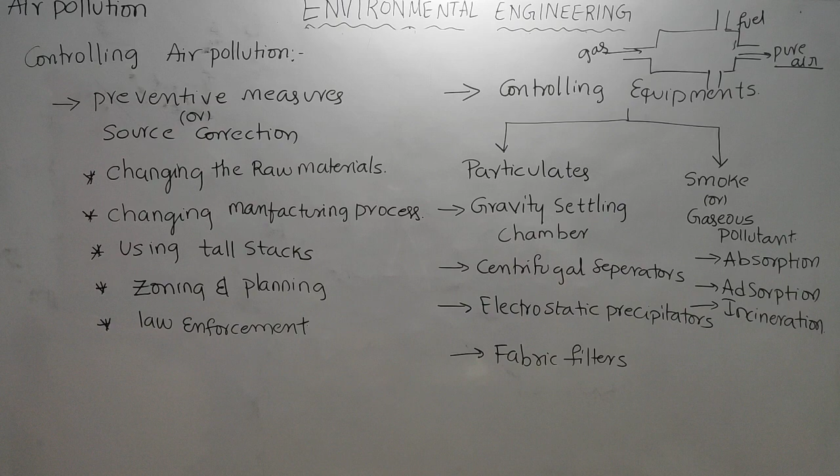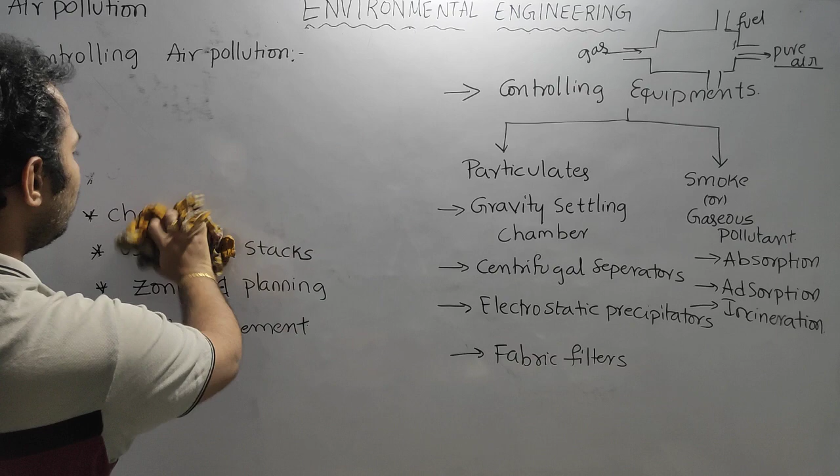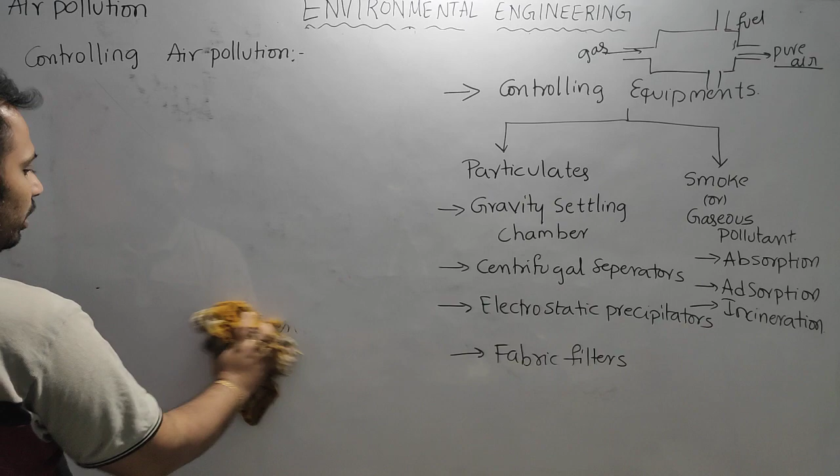In the previous session, we were discussing the controlling equipments for particulates as well as smoke. So here we have discussed all these things: gravity settling chamber. Actually, a small correction here in the gravity settling chamber. Generally, all these equipments work in the dry state. So no spray of water we do here, because if that is there, we call them wet control devices. These are all dry control devices.

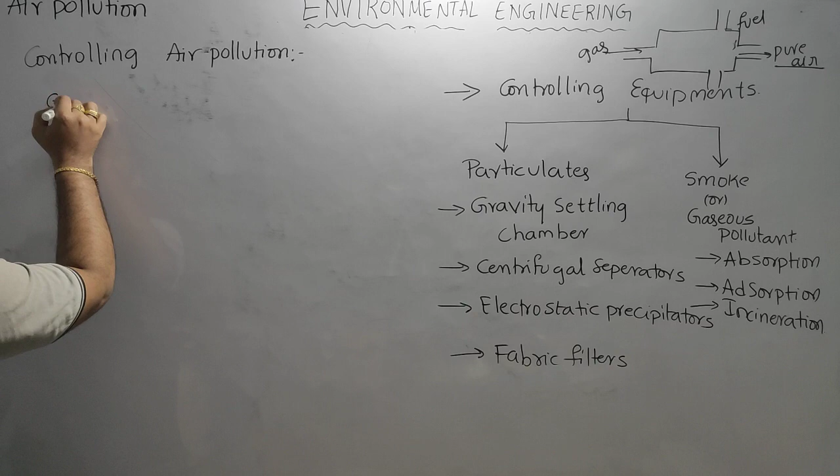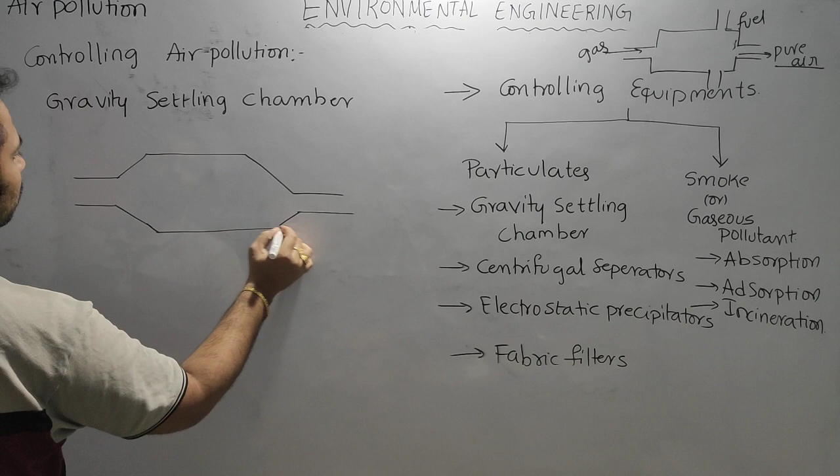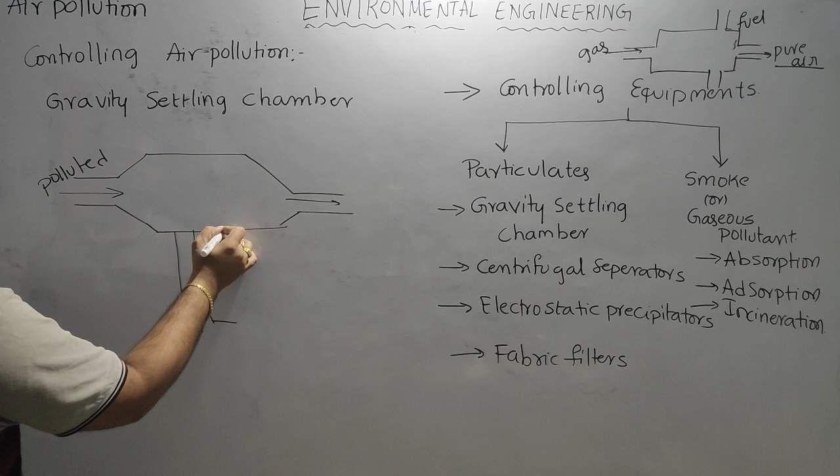So in the dry control devices, the gravity settling chamber, if you look at it, there will be a chamber. Here there will be fans, which pull whatever polluted air is coming into it. So these exhausters will pull down the pollutants.

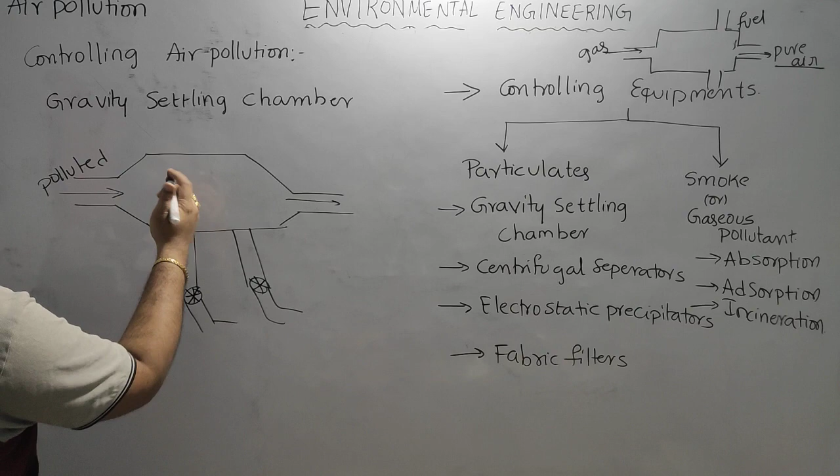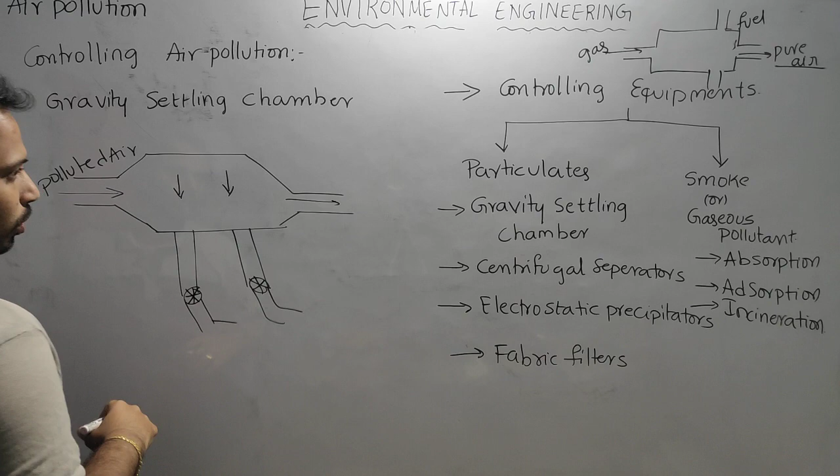They will pull down, that means a velocity will act in this direction. This is the settling velocity. So we send the polluted air into it and we reduce the velocity of the polluted air inside this gravity settling chamber, and some downward velocity will work here. This downward velocity will bring the pollutants down.

Gravity settling chambers generally can only remove larger particulate matters, where the diameter of the particulate is more than 50 micrometer. And the efficiency will be less than 50% because it does not work that much better.

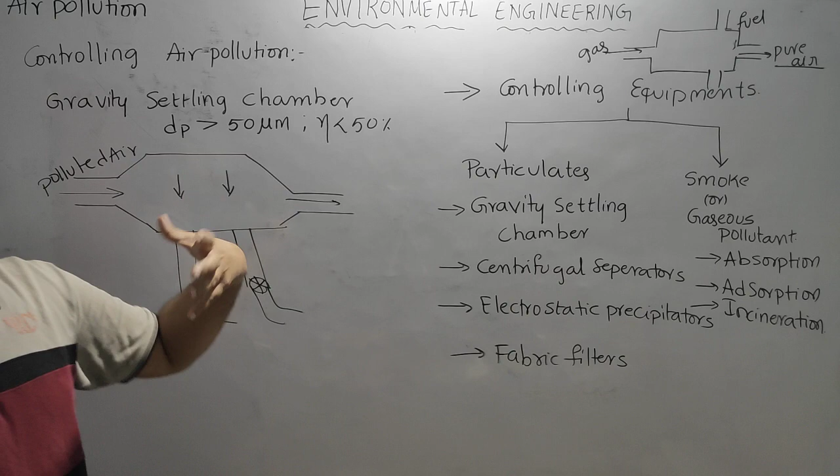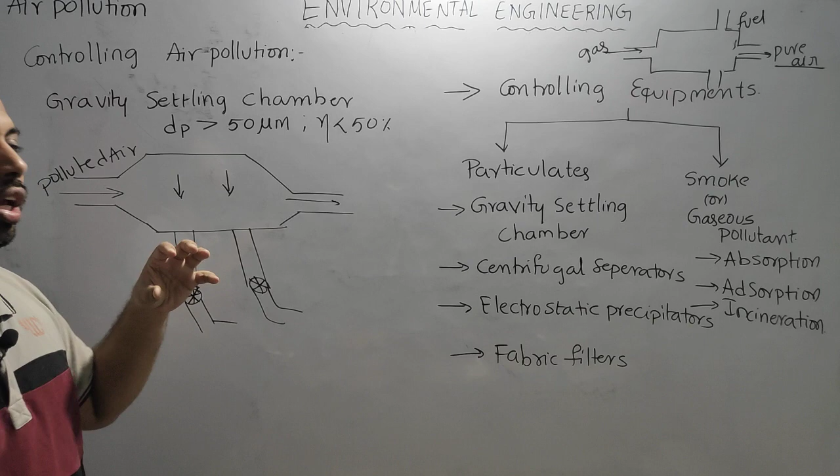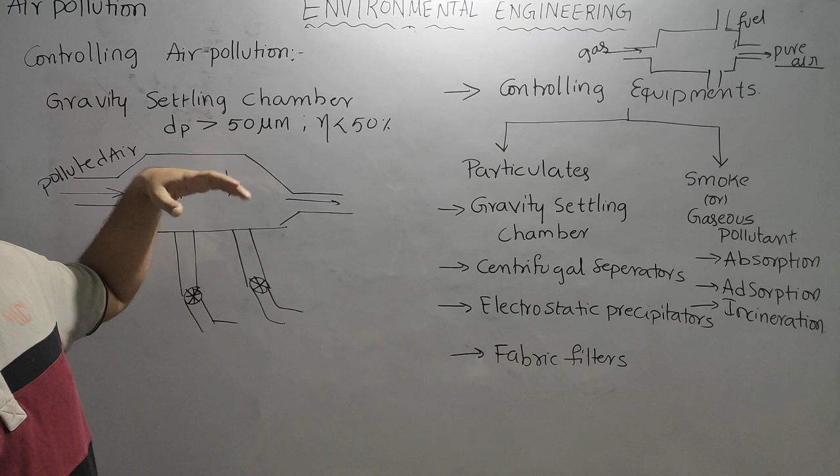We are only pulling down with some velocity, because the force is gravity. Generally the finer particles cannot be controlled by gravity forces. In soil mechanics, finer particles can be controlled with surface forces. So the gravity forces only act on the particles which are larger. Gravitational settling works only on particulates which have a gravitational effect on them. So only the larger particulates can be removed in this chamber, finer materials cannot be removed. That is why the efficiency is very less.

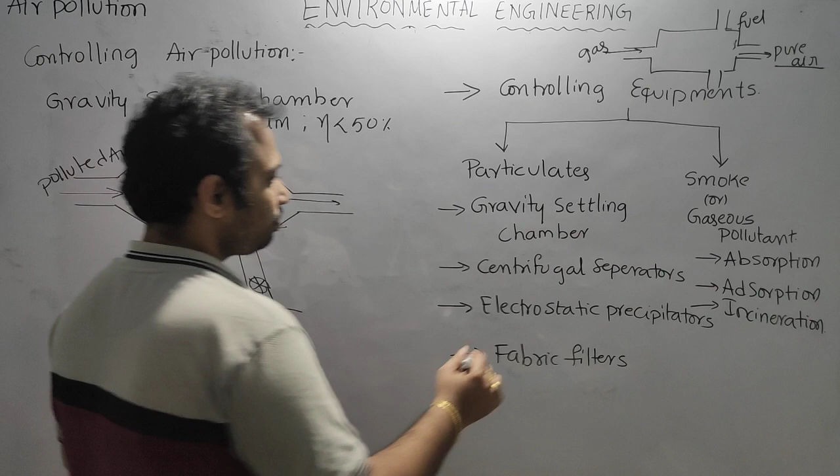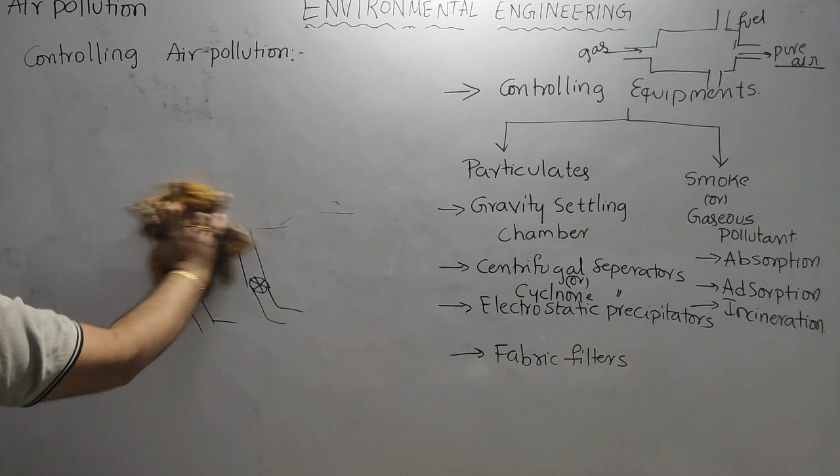Even in the centrifugal separators, or we call them cyclone separators, they are also dependent on a force. Here it is gravity force; there they are dependent on centrifugal force. So in the same way, we are applying some force on the particulates, but it does not work that effectively. It may be better than the gravity settling chamber, but not the best option.

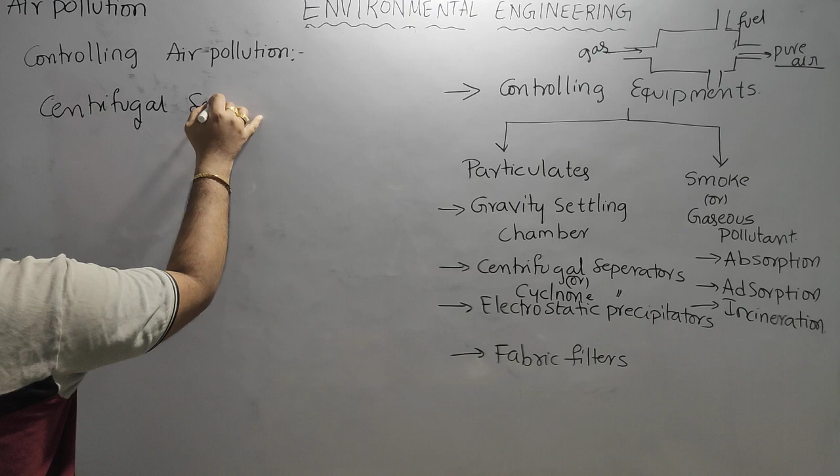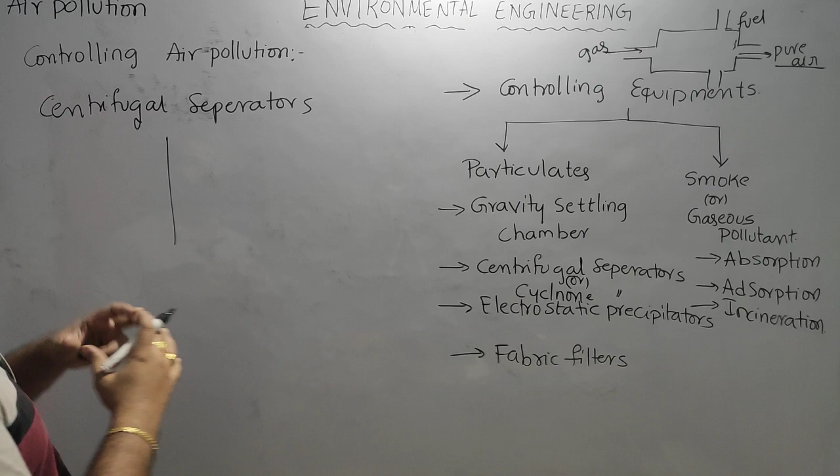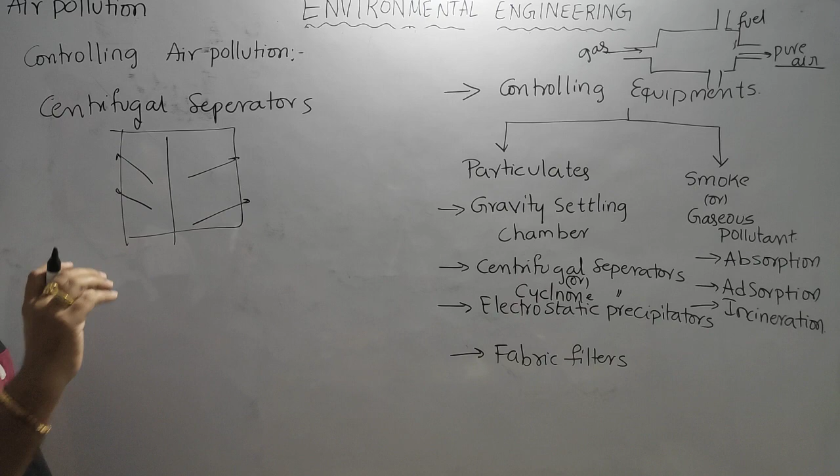So here we will be having a shaft. The shaft will rotate and cause low pressure at the center and high pressure at the outside, because of which the pollutant gas will move away from this shaft. So because of the centrifugation, the particles may get removed. To some extent they will be removed, but not to the extent needed.

Here the diameter of the particle that can be removed is approximately in the range of 5 micrometer to 25 micrometer, and the efficiency varies between 50 to 90%. That is for the centrifugal separator.

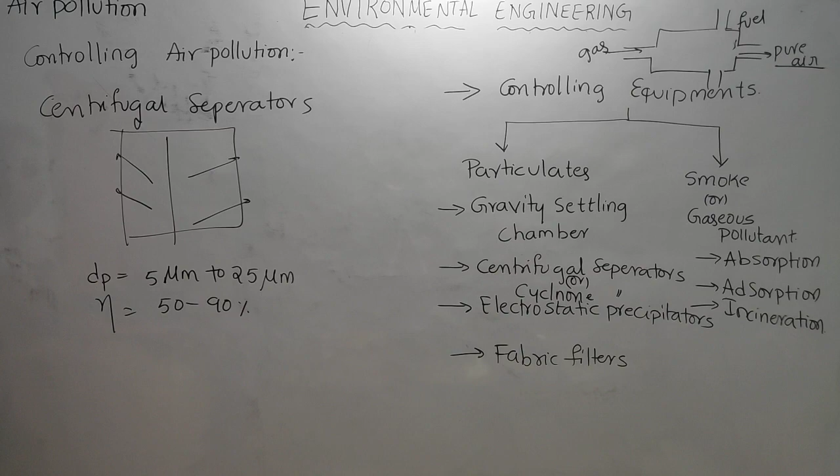Electrostatic precipitator. This is very, very important for the examination.

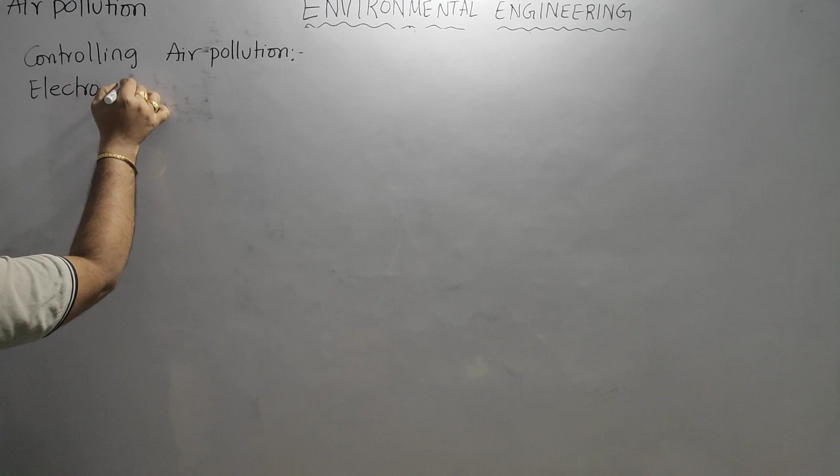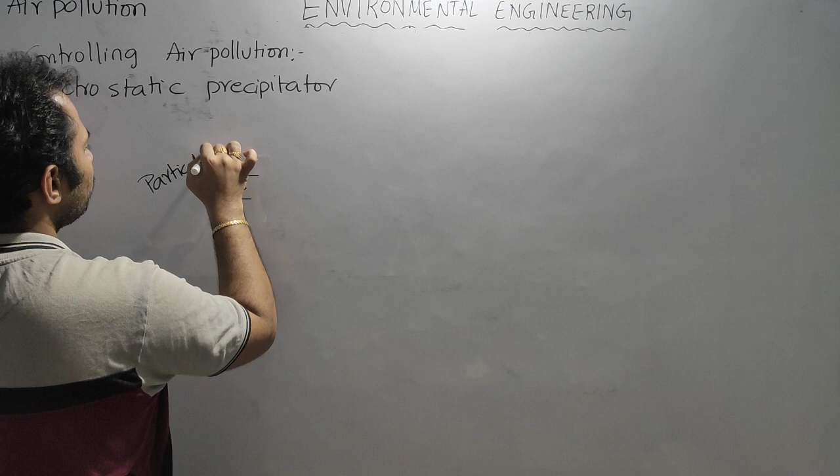Electrostatic precipitator. Here we send the gas, using direct current, through the electrical field. So we will send the gas or particulate matter into the electrical field.

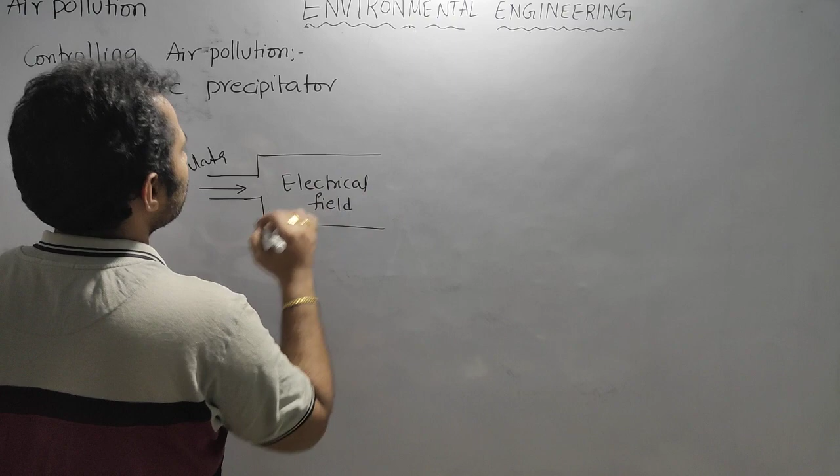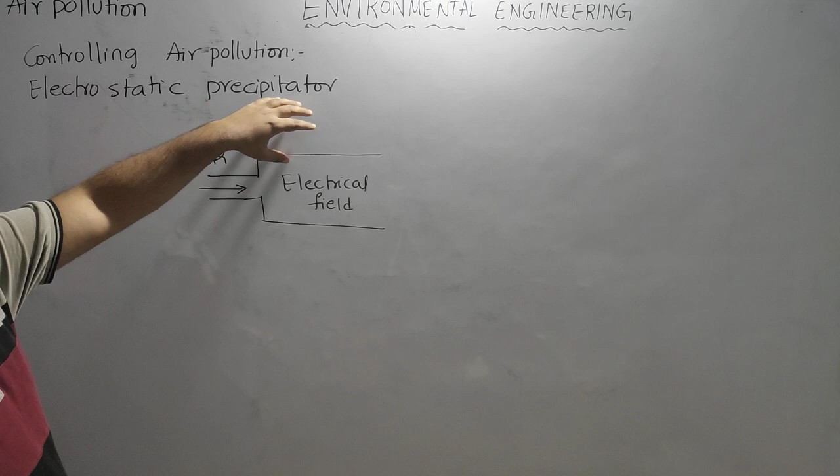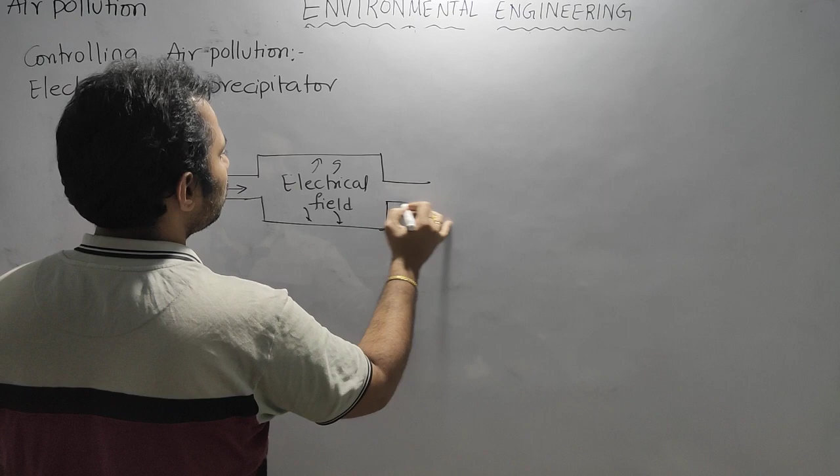When it goes into the electrical field, there will be opposite charges. Generally the particulates carry negative charge because they are very fine, because of wear and tear and all. So we will create a positive charge in this electrical field. Whatever particulates are present will get attracted to the positive charge, and the clear air will go out of this electrostatic precipitator.

So it works on the electrical field, and the efficiency of this electrostatic precipitator is measured using the formula 1 minus e to the power of minus A into W by Q, where A is the area of the plate through which we are sending the particulates. Simply, we can take this as the cross sectional area. W is drift speed, and Q is the rate of flow.

Q is the rate of flow. So using this formula we can find the efficiency of the electrostatic precipitator.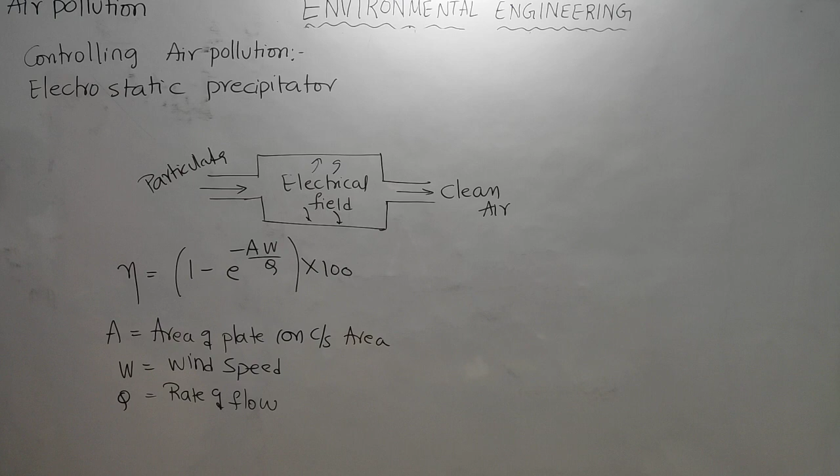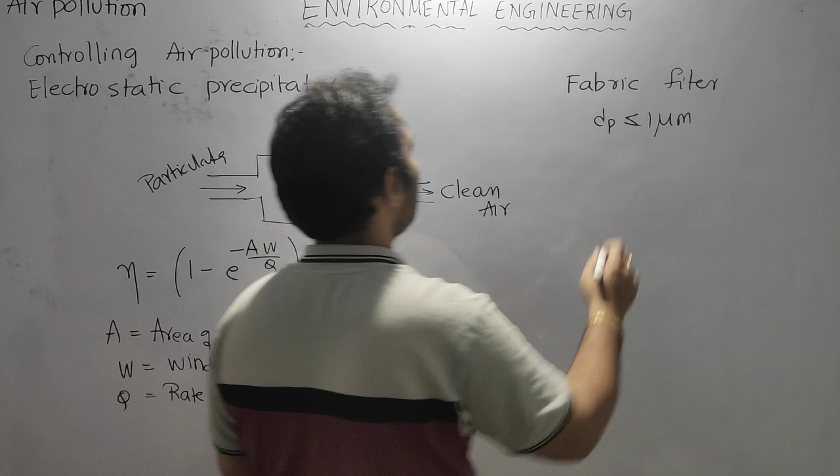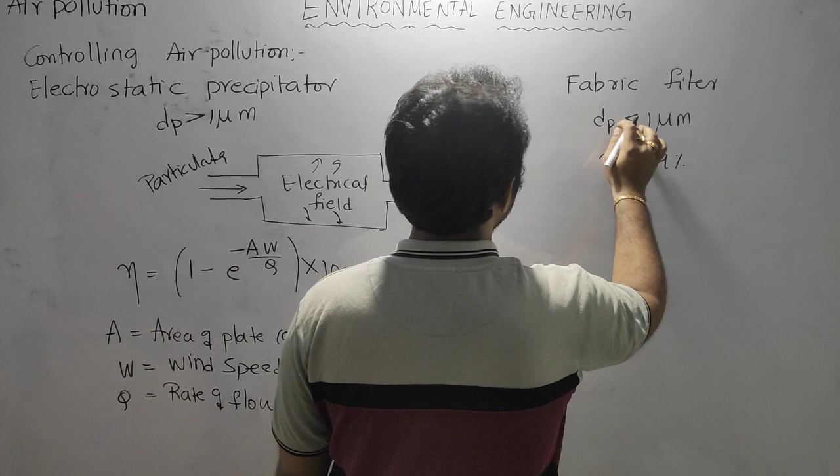Similarly, fabric filters are also filters which can remove very fine particles, and efficiency is also very high. When the diameter of the particle is less than 1 micrometer, it can be removed by fabric filters, whereas an electrostatic precipitator can remove only up to 1 micrometer and below that it cannot remove. So when it is less than 1 micrometer, we use fabric filters, which completely remove it, and the efficiency is greater than 99%. Generally it removes up to less than 1 micrometer.

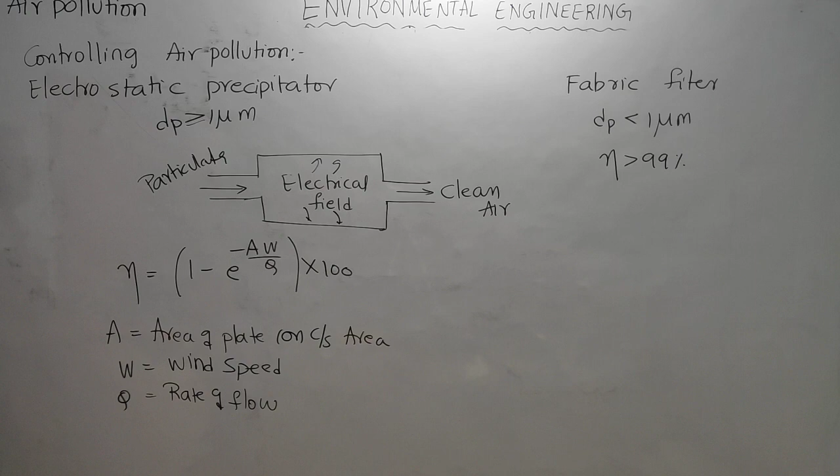So these are the different particulate removal equipments working on dry basis. Then there are wet controlling equipments, meaning they work on moisture also, for controlling air pollution particulate matter using wet controlling devices.

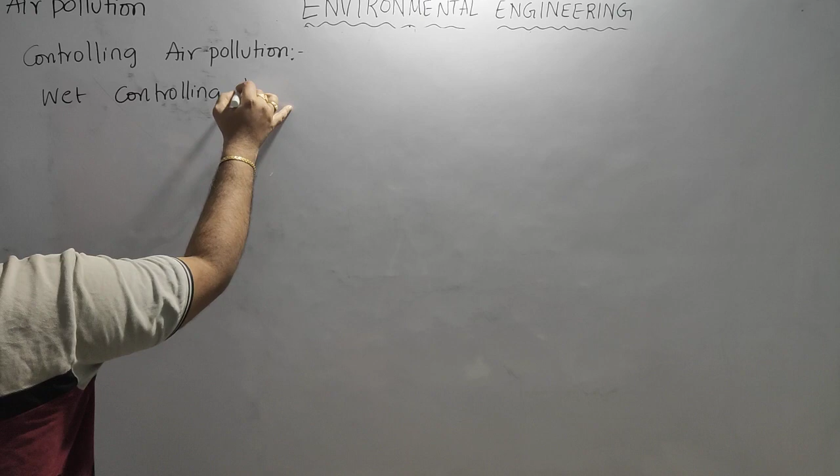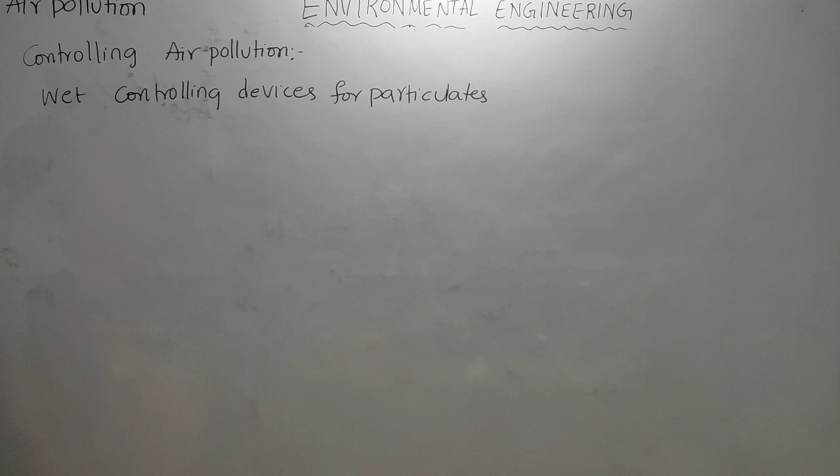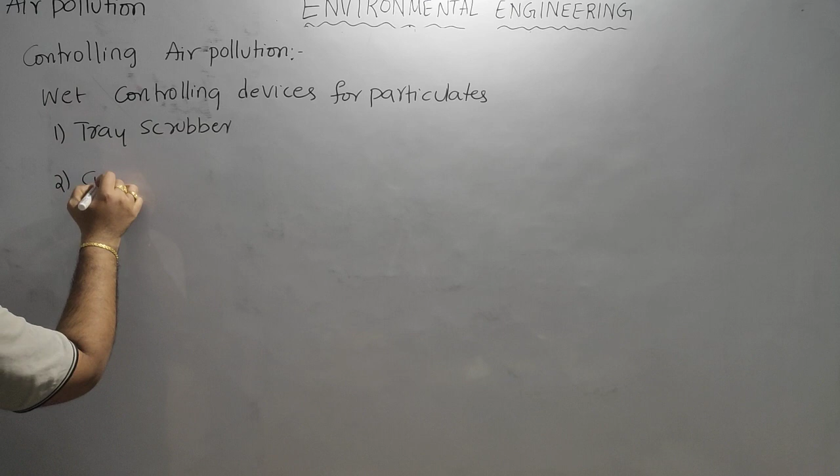So there are three: one is tray scrubber, cyclone scrubber, and the third one is wet scrubber, the Venturi scrubber.

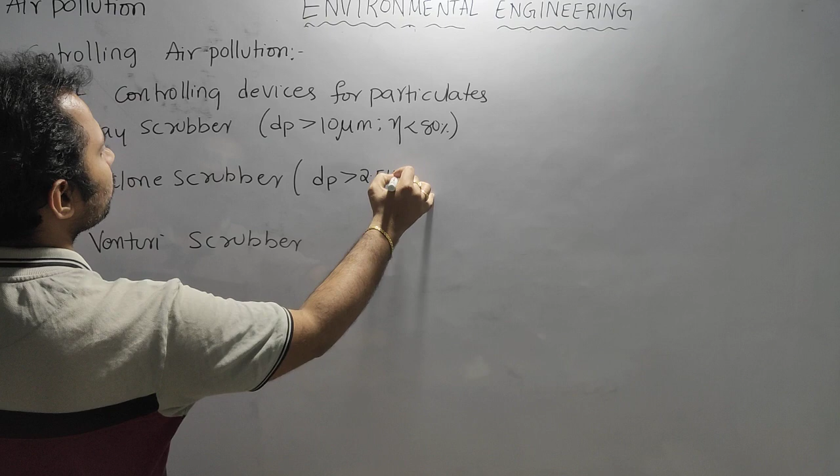When the diameter is greater than 10 micrometer, we use a tray scrubber. If the diameter is greater than 2.5 up to 10 micrometer, we use a cyclone scrubber, having an efficiency of 85%.

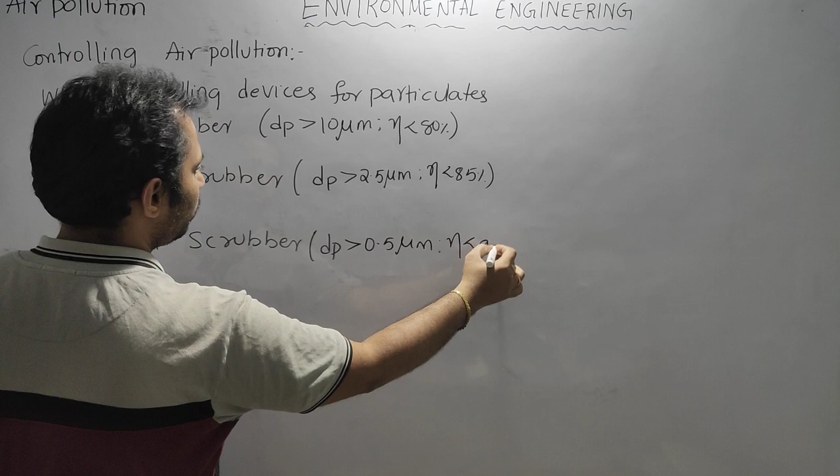If very fine particulates are present, in the range that can remove up to 0.5 micrometer, the efficiency is up to 90%. So these are the different controlling devices based on wet moisture.

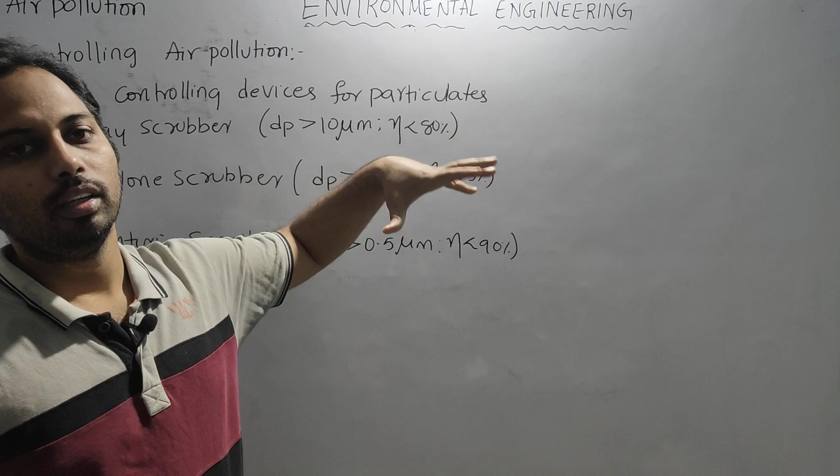Here we have a spray kind of thing, where water spray is present, which increases the weight of the particulate matter because of the moisture, and also creates adhesion. The particles attract each other, increasing cohesion by forming a layer of water on top of the particulate matter. This way we can remove the particulates very easily. So these are the wet controlling devices.

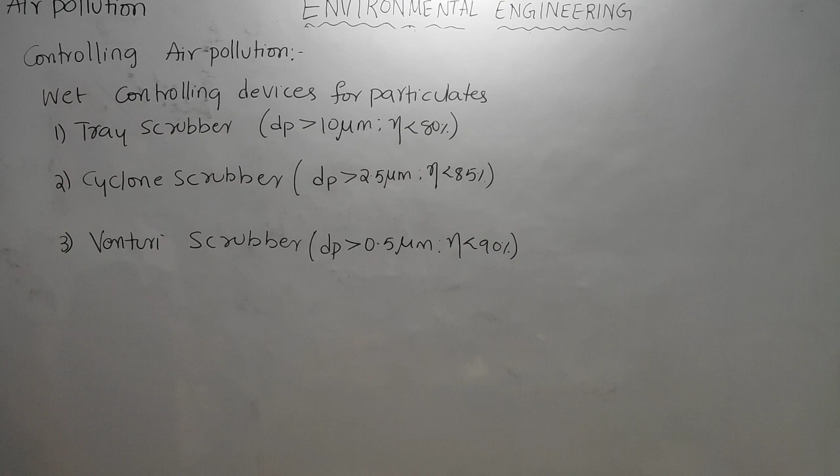And for gaseous controlling devices, as already told, there are three things: absorption, adsorption and incineration, or combustion. So incineration or combustion are both the same. These are the different types of controlling devices or controlling technologies. So this is all about air pollution.

Now we are discussing noise pollution. Noise pollution will be having only three formulas, very important. If we are acquainted with these three formulas, that is enough for the examination.

So what is meant by noise? A noise is nothing but any kind of unwanted sound, which will disturb our concentration, which is not wanted at all. That is nothing but noise, which is also a sound, but it is an unwanted sound.

So what measurement do we do for sound? How do we measure the sound? In the same manner we also measure noise. But sometimes noise can come from only one source, or from multiple sources, or from one source at different intervals of time, and it may be at different amplitudes, different intensities. So for getting an equivalent noise, an average noise, finding all these things is needed.

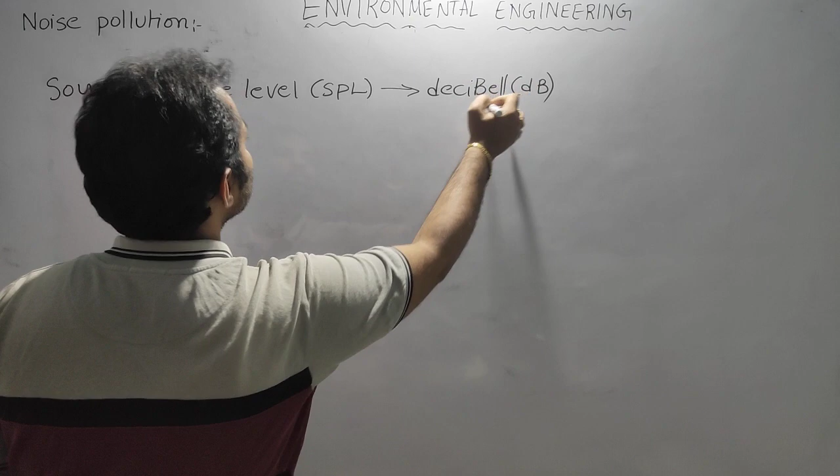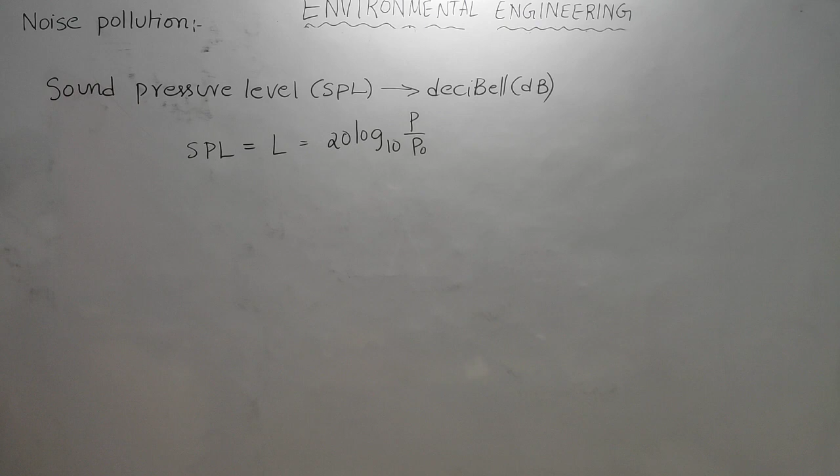So sound pressure level, SPL, is equal to, we represent it with L, 20 log base 10 of P over P naught, where P naught is the reference sound or reference pressure, and P is the pressure of the source in micropascal, where P naught is the reference pressure.

Reference pressure, which we take as 20 micropascal. So this is the formula which we use to find the sound pressure level.

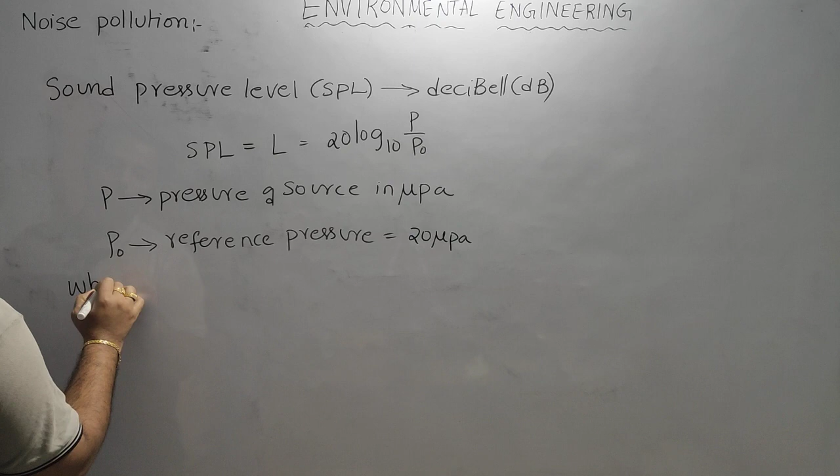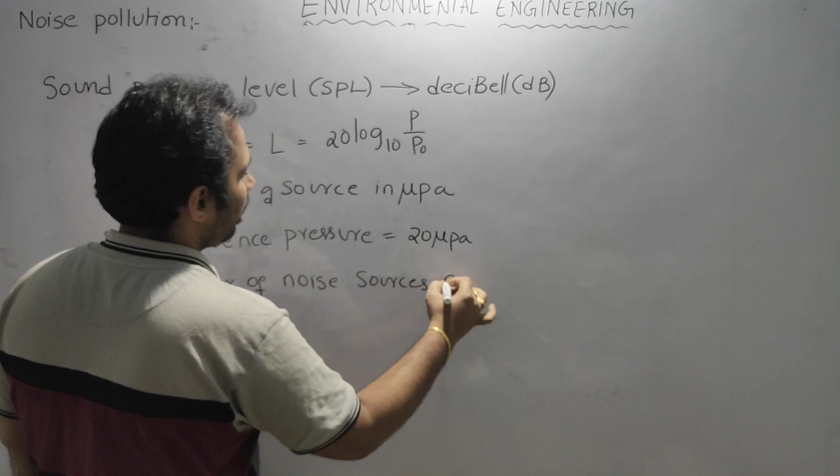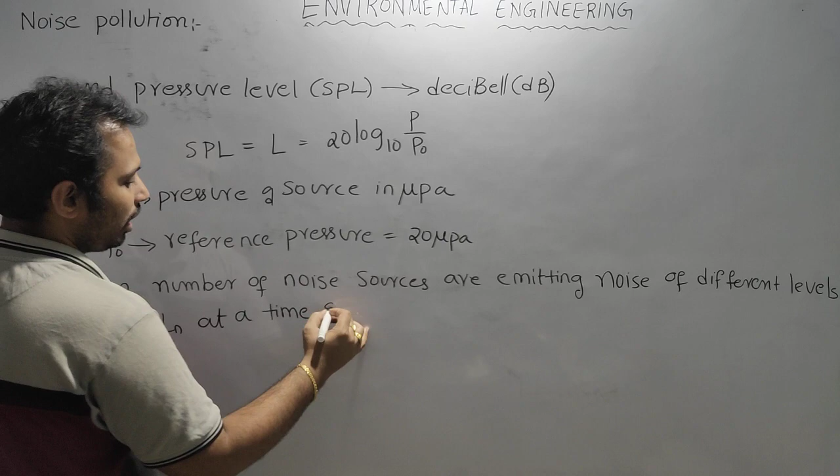So this is the first formula. Now, when number of noise sources are emitting noise of different sounds, of different levels, L1, L2 and so on, Ln, at a time and at a place.

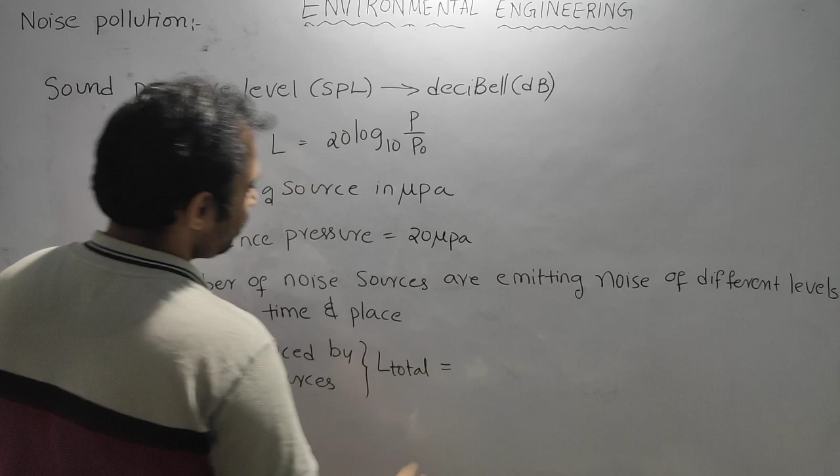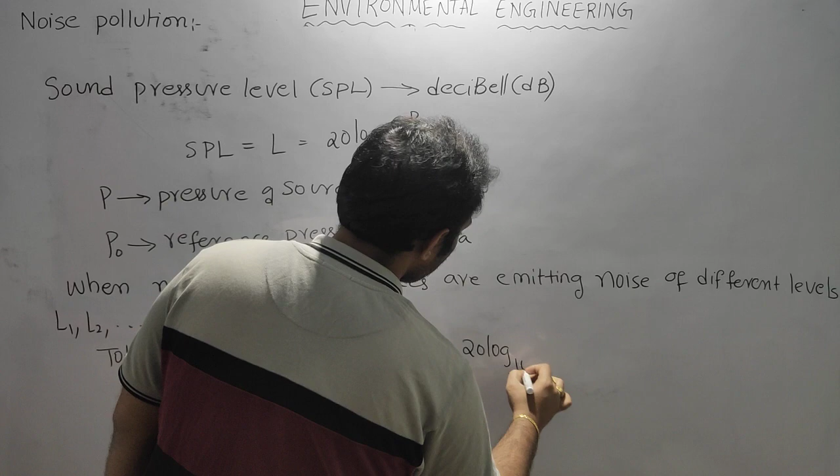Then the total sound produced by different sources, that is L total, is equal to 20 log 10 of PRMS by P naught.

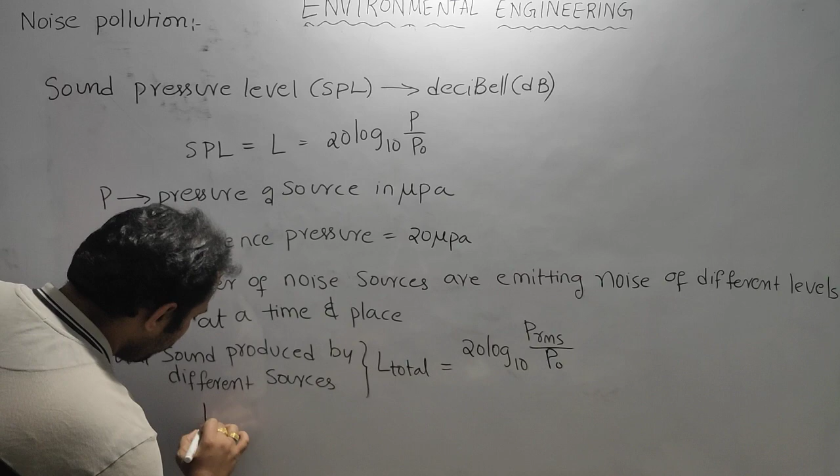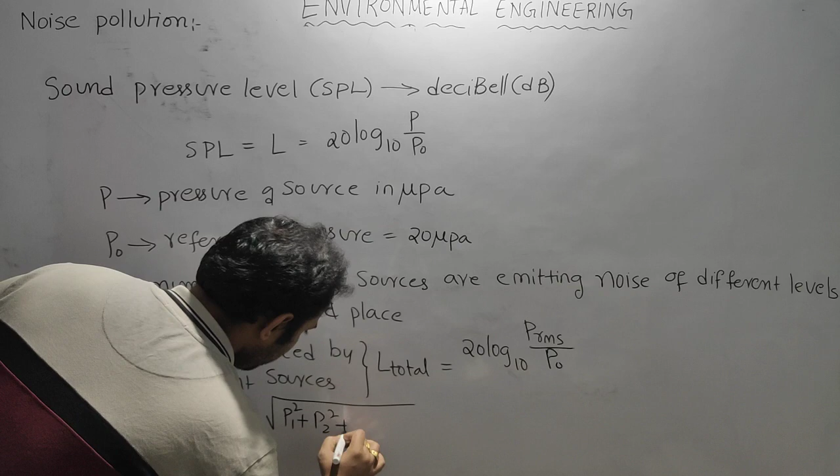PRMS is nothing but root mean square of all the pressure levels, P1, P2, and so on. By this way we can find the L total. So this is another way to find the L total.

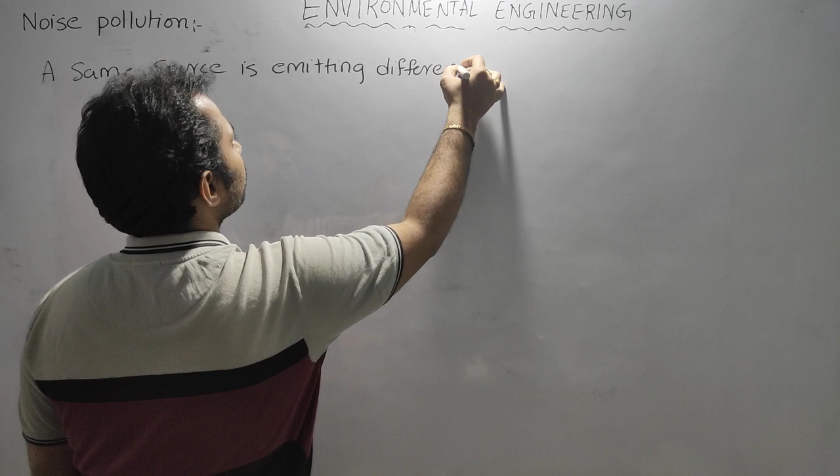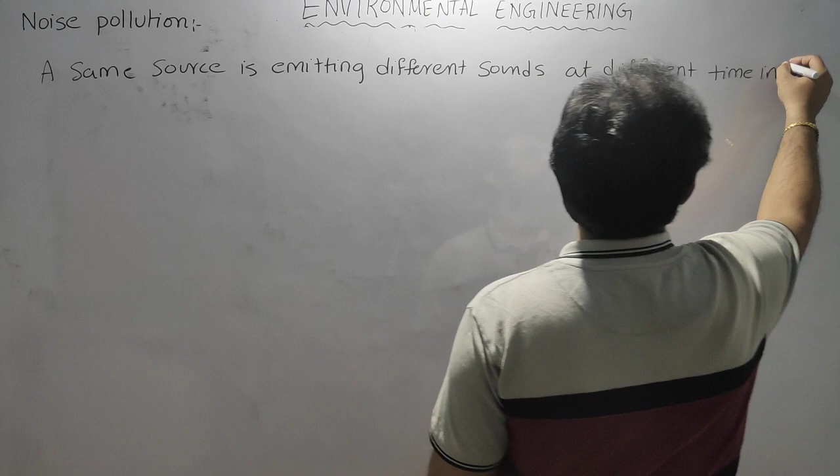If the same source is emitting different sounds at different time intervals, then the average sound of the source is calculated.

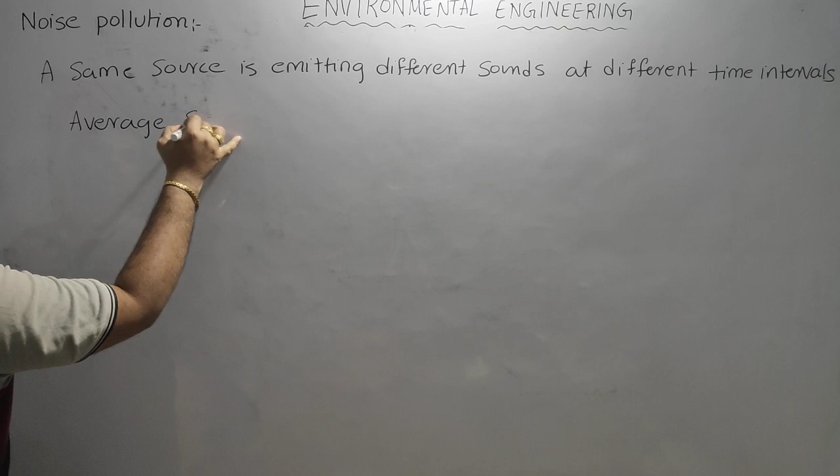Average sound of the source, L bar, is equal to 20 log 10 of 1 by n, sigma of 10 to the power of Li by 20.

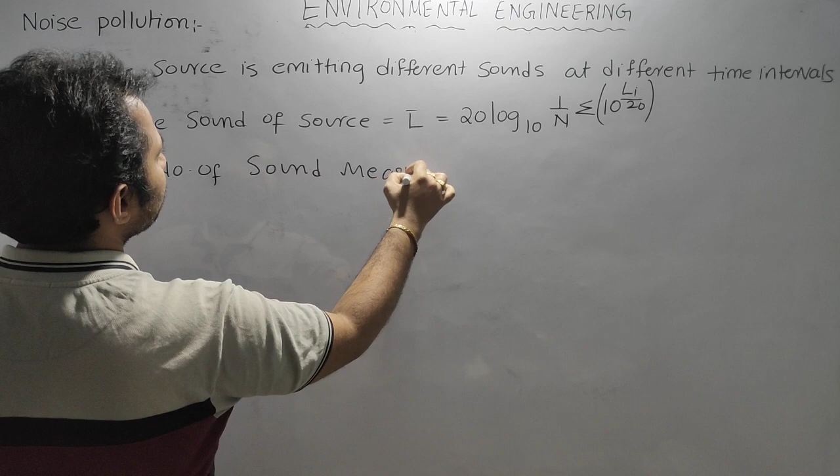N is the number of sound measurements. So at each measurement we will be having L1, L2, L3, like that.

So once the sound measurement has come, let it be P1. So L1 is nothing but 20 log to the base 10 of P1 by P0, that is L1. Likewise L2 is 20 log to the base 10 of P2 by P0. So likewise we find L1, L2, L3, or sometimes L1, L2, L3 will be provided directly.

So you can take that also. By doing that we can find the average sound of the source. From this average sound, we can also find the equivalent sound, equivalent noise.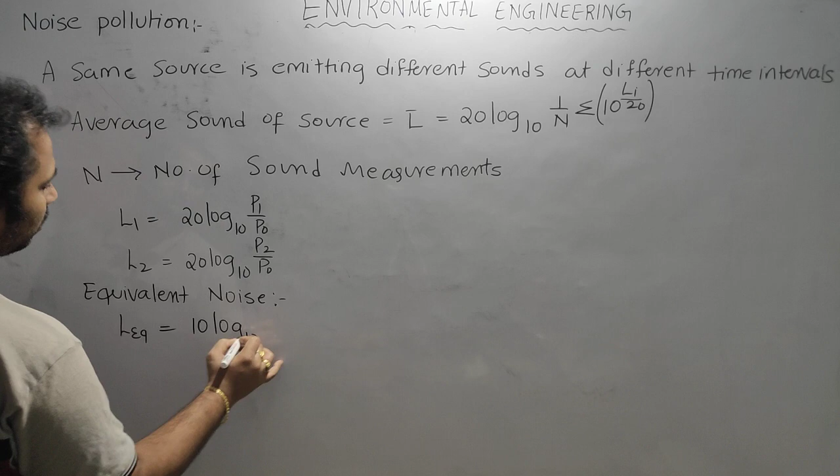Equivalent noise, L equivalent, is equal to 10 log 10 into sigma of 10 to the power of Li by 20 into Ti. So this is equivalent sound, this is average sound of the source, this is equivalent noise.

Equivalent noise: Ti is nothing but the average, that is the time period of that noise and the total time. Ti is nothing but Ti by capital T. Capital T is sum of all the times, that is T1 plus T2 plus T3 and so on up to Tn.

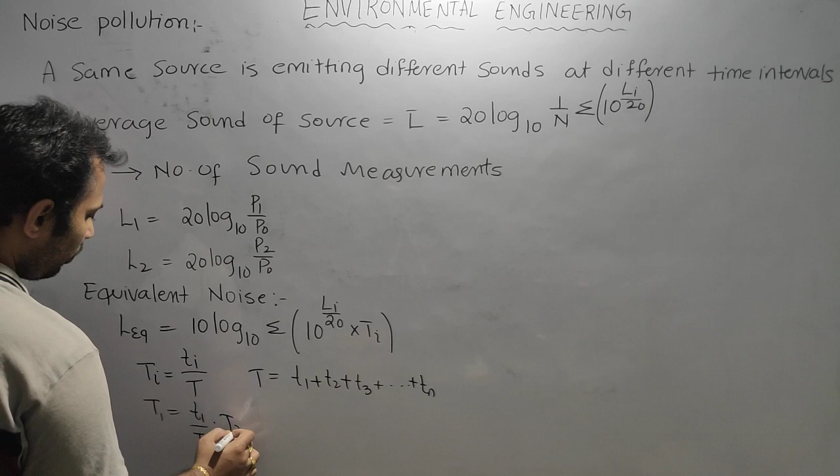So this is capital T. Small ti is nothing but T1 by capital T. So T1 is equal to T1 by capital T, T2 is equal to T2 by capital T, where capital T is the sum of all the durations. Li is the intensities, the sound pressure levels, SPL, that is L.

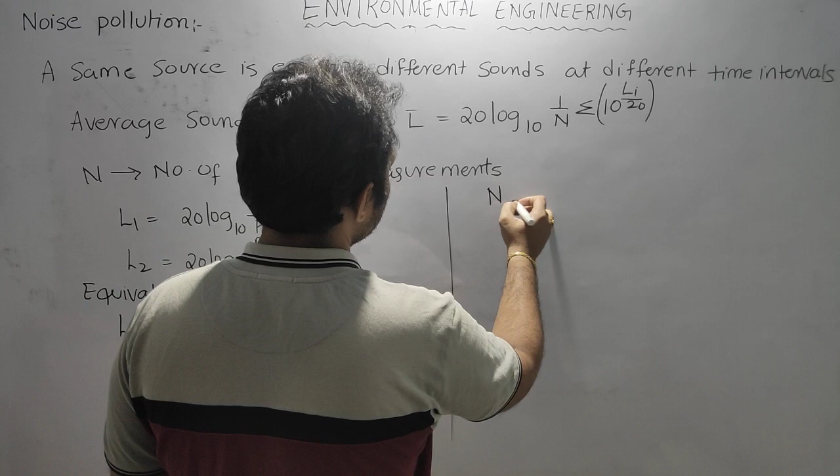So these are the formulas which are important for the GATE examination. And there are noise standards given by the Indian standards, Indian code, noise standards.

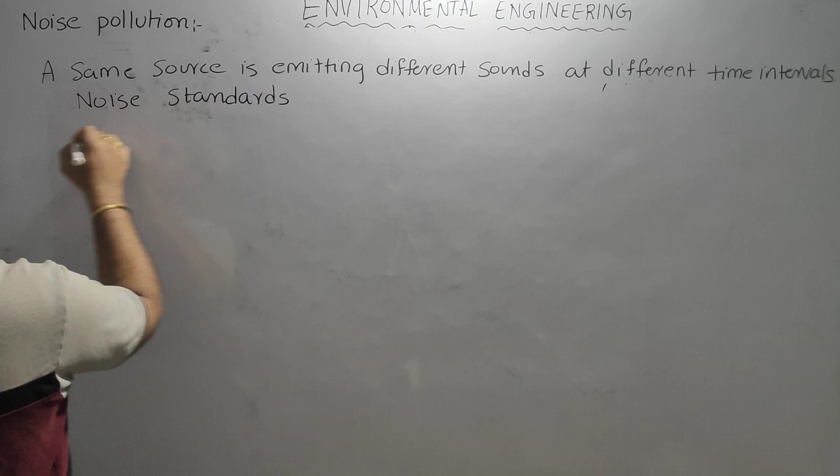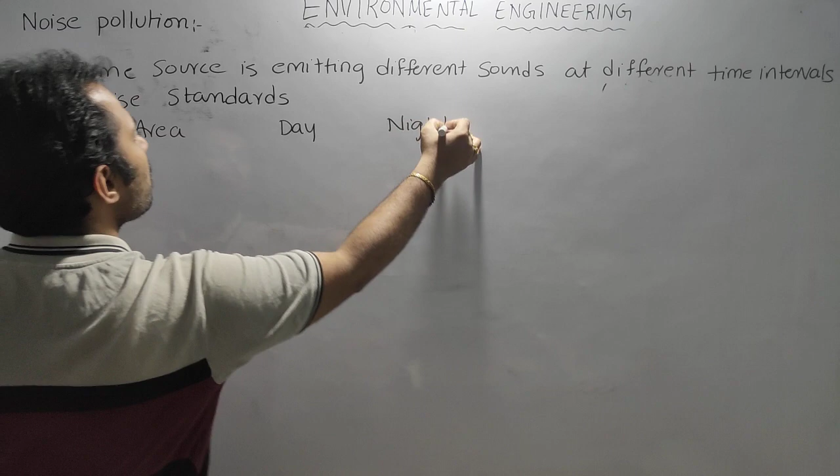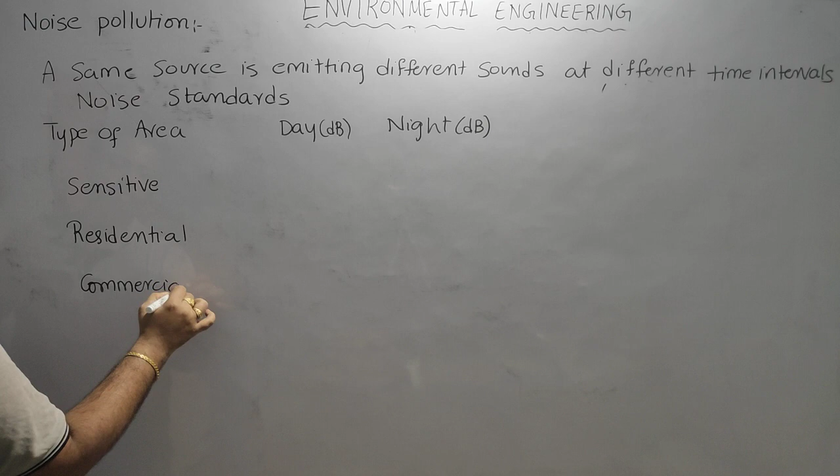Type of area, decibels: sensitive area, residential area, commercial area, industrial area.

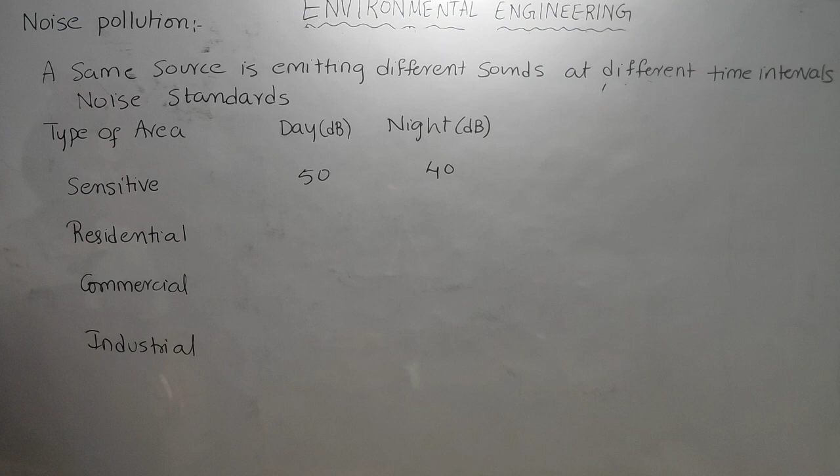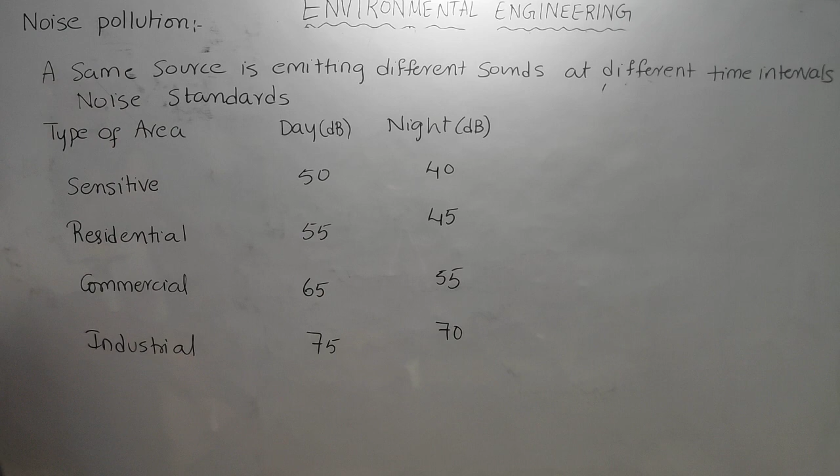During daytime 50 and during night time 40 for sensitive area. For residential area, 55 and 45. For commercial area, 65 and 55. For industrial area, it is 75 and 70. So these are the noise standards given by the Indian standards.

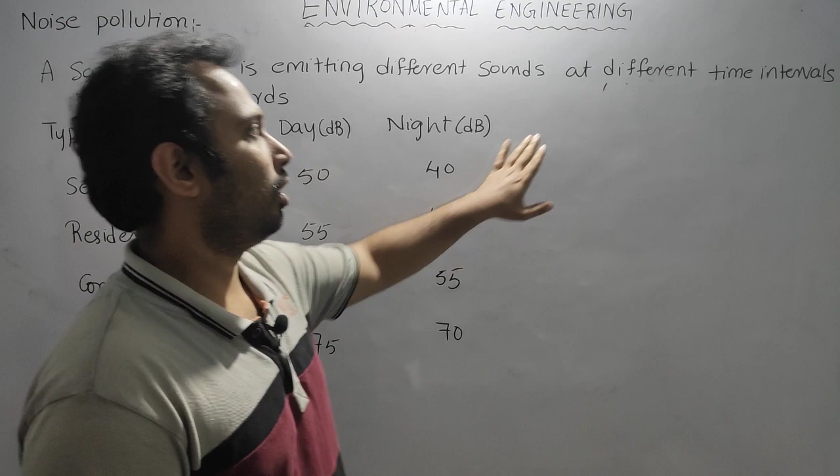So this is all about noise pollution, this is enough for noise pollution. What we will do is discuss the questions in the next session. We will start with the previous GATE questions from air pollution and noise pollution, and then we will conclude the total syllabus. Thank you so much.